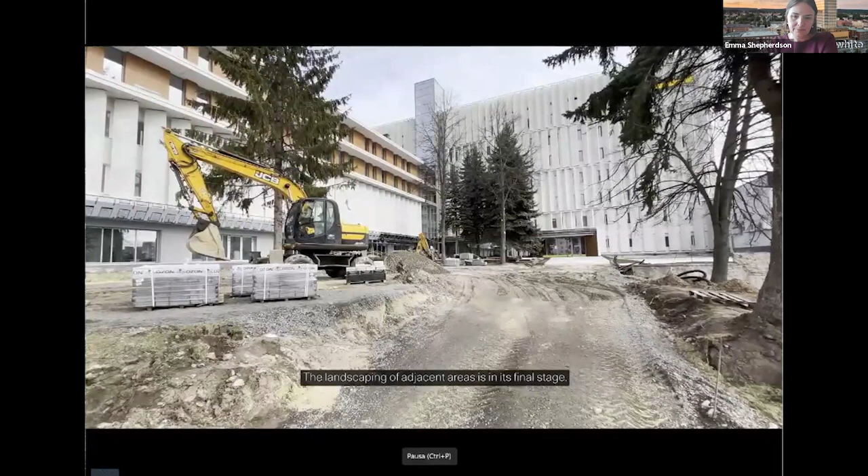Construction site, 12th of March 2025. The first stage involved the reconstruction of the 7-story building, with no significant changes to the overall volume. An accessible terrace was installed, and an external elevator was added, allowing transportation of patients on medical beds. Regarding the lower 3-story building, its reconstruction involved demolition of the upper, 4th technical floor. Two new floors made of CLT structures were then added. The landscaping of adjacent areas is in its final stage, with a large amount of earthwork being carried out to eliminate previous barriers.

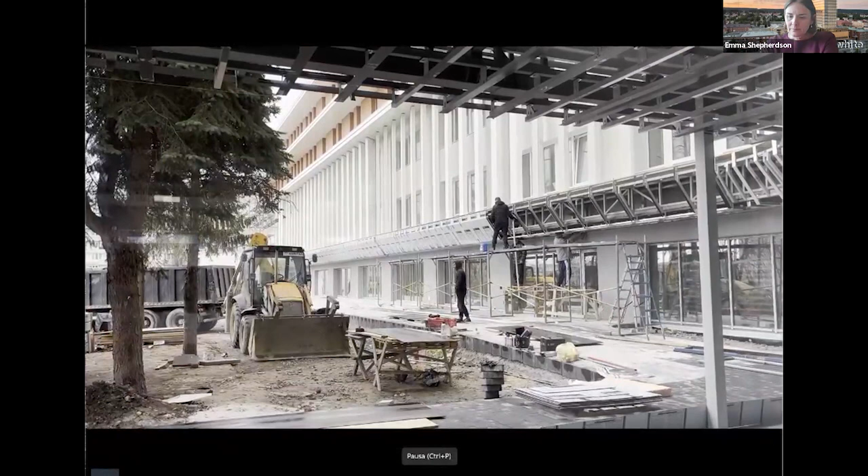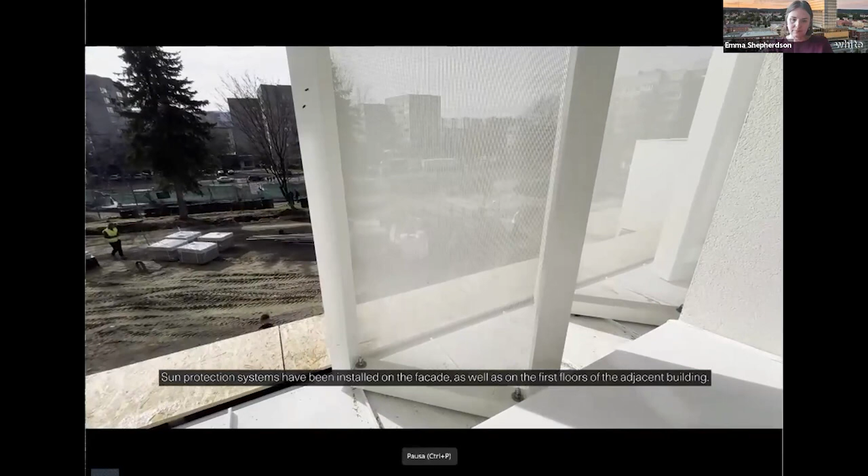The 7-story building has been reconstructed for rehabilitation purposes with patient rooms. Sun protection systems have been installed on the facade, as well as on the first floors of the adjacent building. A transparent tunnel connects the old hospital buildings.

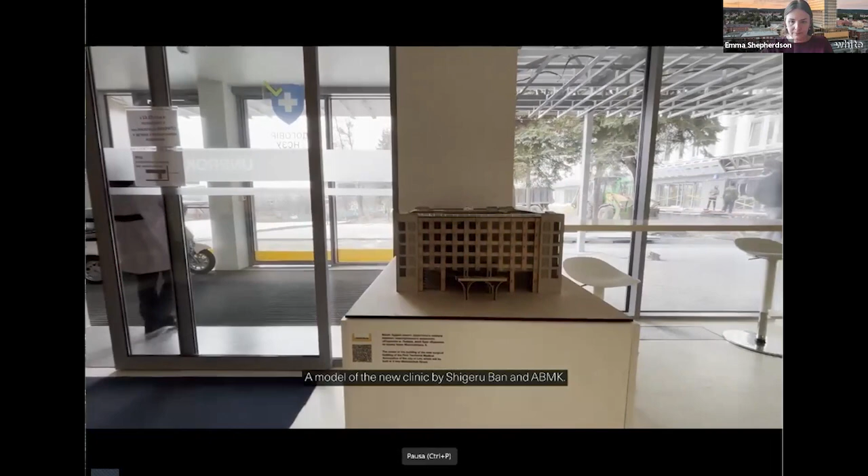All interiors have been fundamentally updated. A model of the new clinic by Shigeru Ban and ABMK. The reception area and entrance group have been updated, with ramps replacing the former stairs. A previously filled-in pool on the first floor has also been restored.

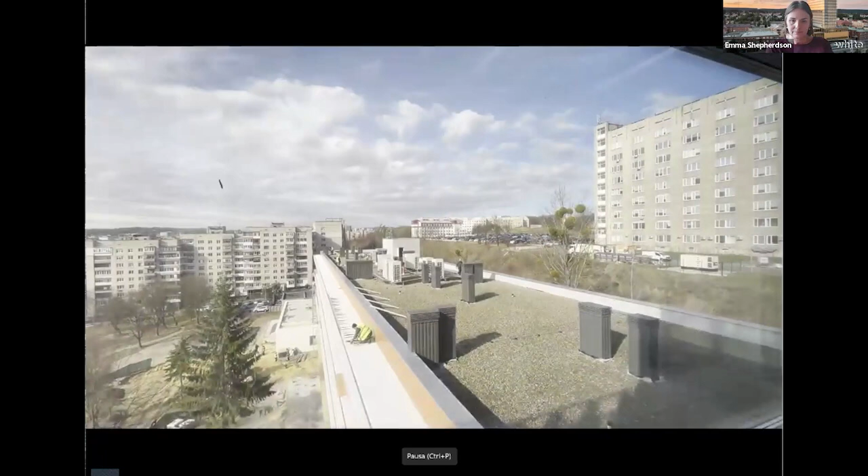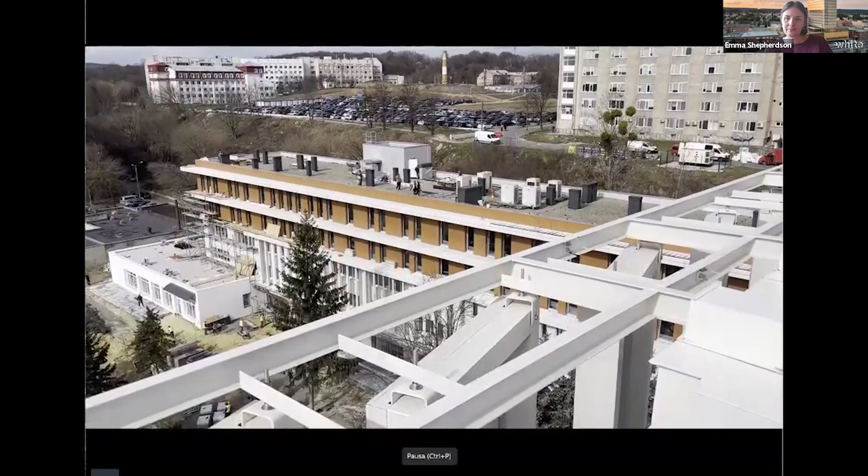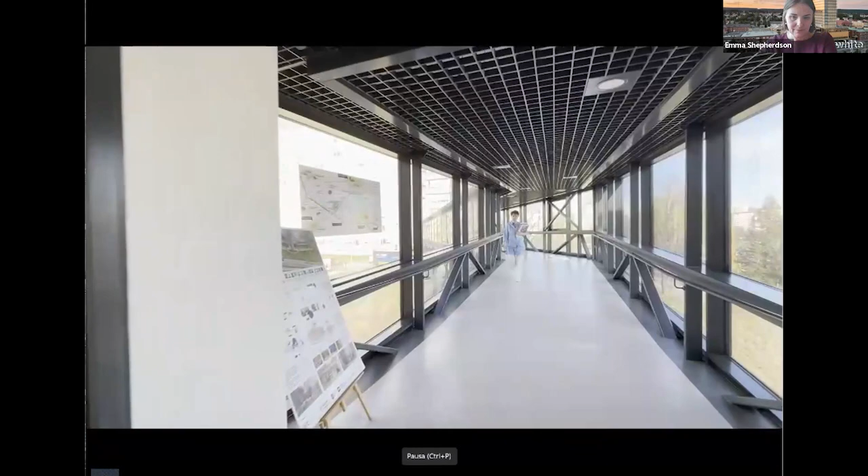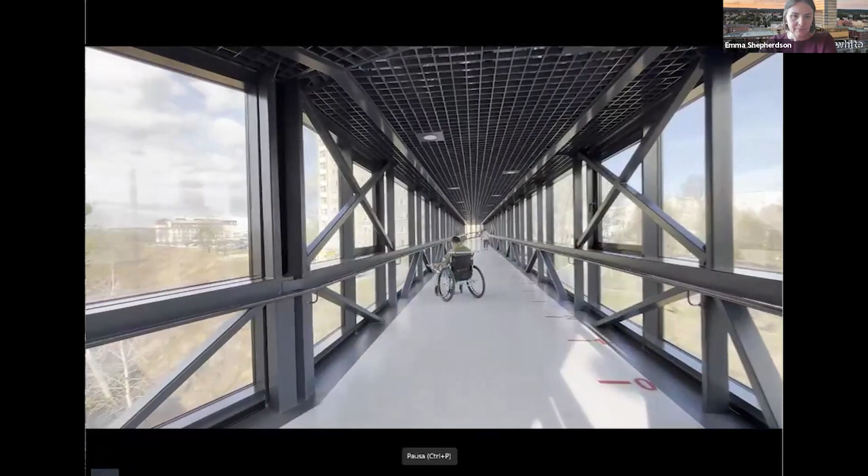An observation and recreational terrace has been created on the roof for clinic patients, combining physical and mental rehabilitation functions. The terrace also serves as an open-air event space for patients and visitors. On the 7th floor, in addition to rehabilitation rooms, there is an occupational therapy kitchen in the common area, and a meeting room.

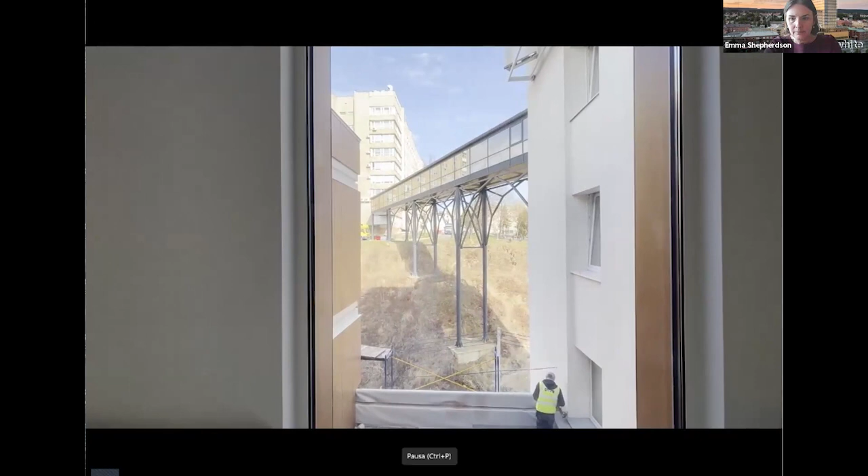View from a patient room window onto the renovated building facade. Corner Rehabilitation Ward.

In each room and restroom, a patient monitoring and staff alert system has been implemented, ensuring a quick response from medical personnel.

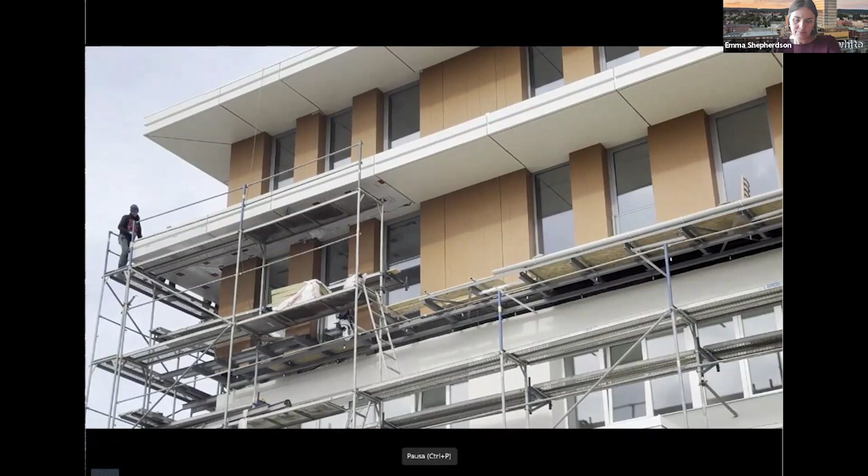The newly added upper volumes differ in material and color from the main structure.

Two crucial features of this technology, particularly important for our project, are weight and speed. The main volume of the extension was assembled on site within 2 weeks. The decision to add 2 lightweight construction floors made of CLT panels is innovative for Ukraine.

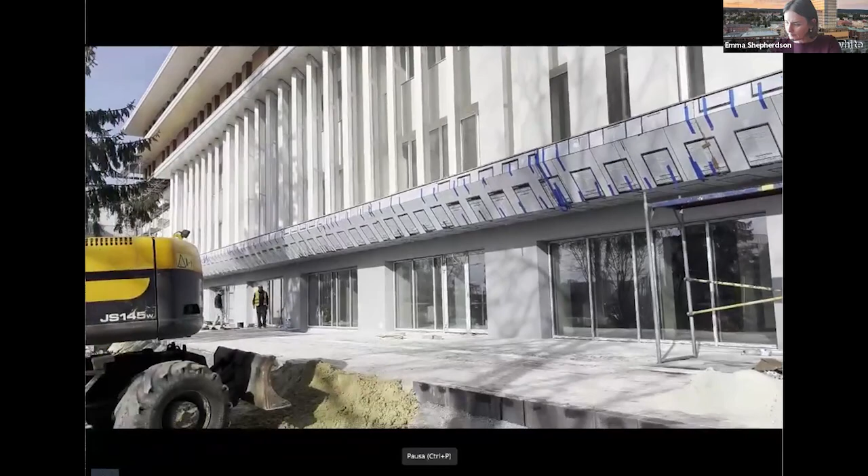Overall, despite initial skepticism, the city and the client are satisfied with the result. This gives us credit for further developing this technology in Ukraine. The ABMK team handled the architectural design, engineering, and technical support.

Rooftop of the timber addition with engineering equipment.

So that's it. Thank you, colleagues, for sharing.

I was not correct when I told about 2 months. The correct time was 2 weeks. So it's really incredible that it was possible in Ukraine.

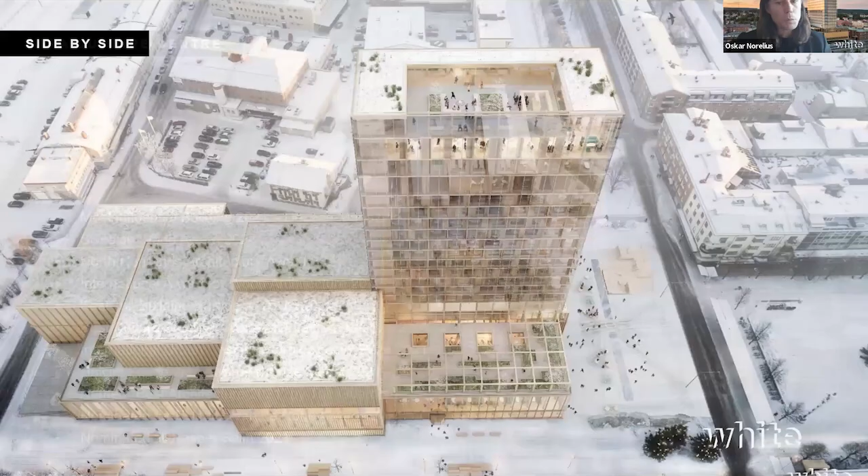Going back to the competition and our first approach, the building was to house approximately 30,000 square meters: a hotel with 200 rooms, restaurants, spa and gym, but also, and maybe first and foremost, a culture center with 6 theater stages of different sizes, the public library, and 2 exhibition halls for art. All of this was already existing in Skellefteå as activities of very high quality on a national level, to be co-located in this building right at the center of the city.

So this was our vision image, and the motto was side by side: we would create this series of volumes in a composition that made up the culture center, where each part was readable in the design of the building, and where every function had a purpose, a space built for its purpose.

This was also a big part of the puzzle: working with the intrinsic characteristics of timber, making sure we were not stacking programs over each other in a way that would make this impossible to build in timber. Instead we really sectioned everything up, making sure we had the flows internally, but also making sure that structurally we could realize this building in wood.

I mentioned the contents, and one key decision was that yes, we need to separate everything so we can work with the structure, the acoustics, and make the logistics work. But we also want people to come together, and these activities to function as a whole.

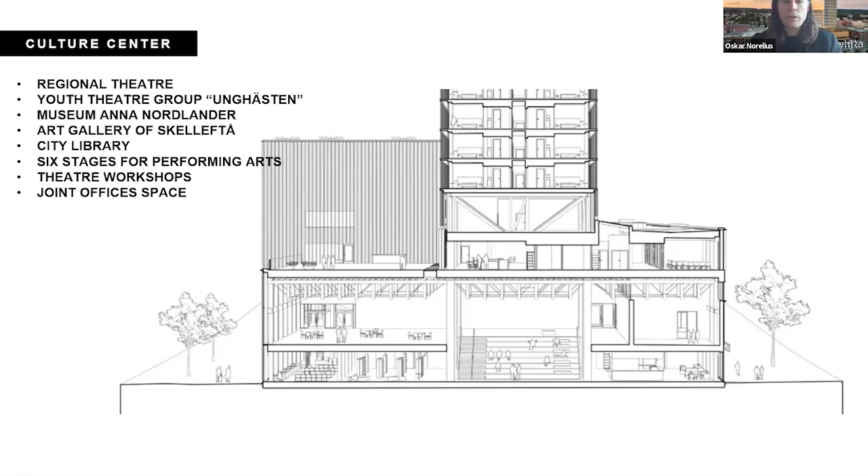This, of course, drives complexity. So we needed to work very closely with a structural engineer to make sure that this was feasible and could become a space where people would feel at home.

The same view in plan: you can see the main entrance on the right-hand side of the image, where you step into this culture staircase. You can see the massive columns supporting the hotel above, then the hotel lobby, the library that runs along the pedestrianized street on the west side, and then, sunken underground, the services and the trap rooms for the stages.

The site is sloping, so we have a one-story height difference from the main entrance to the south to the north. We get two public floors, but this one is public on the south and then becomes underground to the north. We'll come back to the upper level in a while.

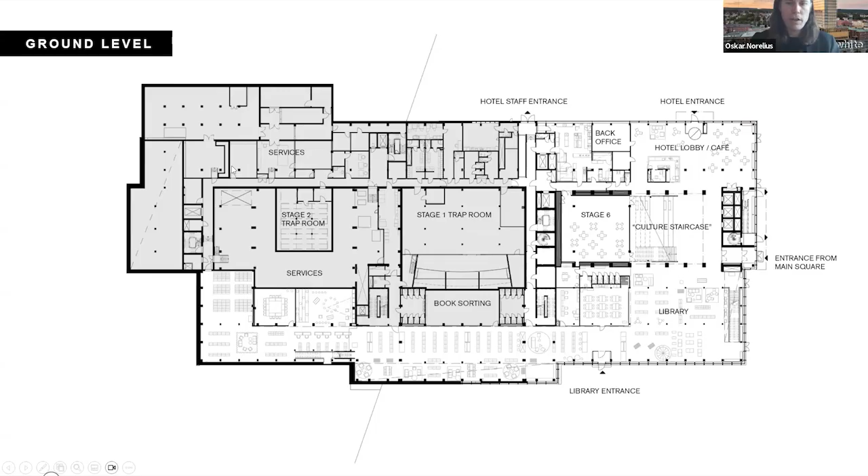This is the culture staircase, the central space you enter into, where we really worked to keep things as clean as possible, to make sure it was a space of high quality with symmetry, a space that people could really appreciate, even with all the challenges of the 20-story hotel above and all these different functions around this space.

You can see here that the timber is largely exposed: the floor slab above in CLT, the glulam columns, everything is visible. You can touch it, and it's really the structure of the building that shapes this space.

While we managed to get this very nice photo before the inauguration, this is what this space looks like most days, with spontaneous lectures or discussions, concerts, book readings. It's really a space being used by all of these actors in the building, bringing life to the Culture Center and to Skellefteå as a whole. You can see the importance of this kind of gathering in a large space like this, made in such a warm atmosphere thanks to the exposed timber.

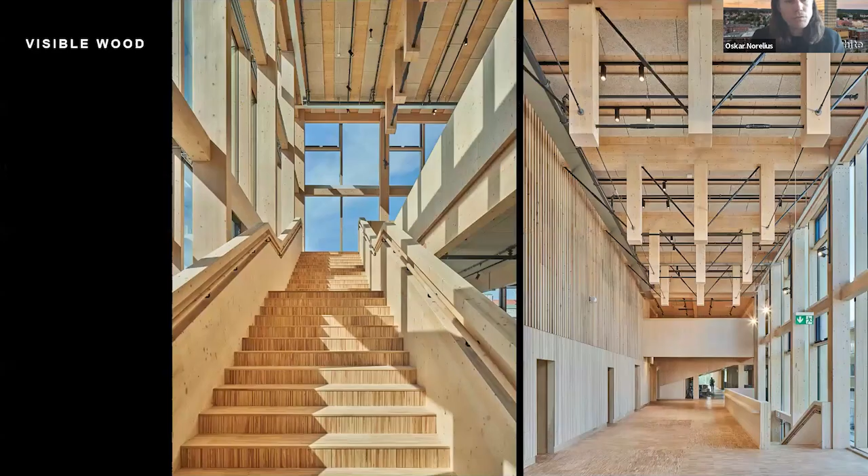Speaking of exposed timber, this was one of the big challenges, of course. We are realizing this building in mass timber to a very large extent. We knew it would be a challenge, so we really wanted to use all of this timber to shape the interior spaces, work with indoor climate, and make sure that the users could actually touch and feel the structure.

And not just something being told that there is timber behind a gypsum wall, for example. This is feasible in Sweden thanks to our regulation that is performance-based. It still required a lot of work to work out the fire protection strategy, but thanks to our regulation, it was possible through hard work with the fire engineers, the structural engineers, and us, the architects, to realize the building in this way. And then you can unlock the materiality of timber and these large-scale industrialized panels that do have this very human-scaled texture and the warmth to the touch that gives a completely new interface to a building of this scale to the users.

Stepping up one level, you can see the culture staircase going down to the main entrance to the south. We're now at level with the north entrance, which is the entrance from the travel center. And this is the level of all of the theater stages and the exhibition spaces. This was key in the design, to gather all of these functions on one level, where loading and switching between different activities and performances in these stages is very efficient.

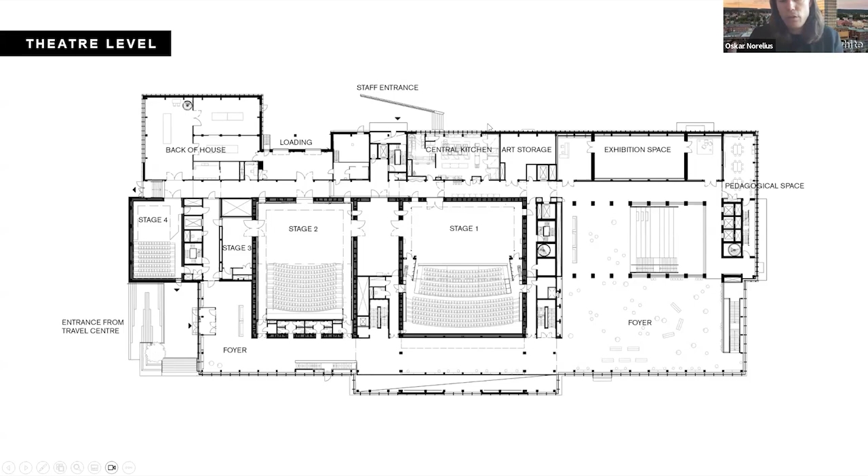And these spaces wrapping around need to be flexible. They need to be used for different purposes today, but they also need to ensure a long lifespan for this building, that it can be used in 50, 60, 80 years' time as a culture center. We have no idea today how that will be running, but we do know that with large spans, big open spaces, you can use it for dance rehearsals, exhibitions, book readings, gala dinners, and conferences already today. So this will be possible in the future.

This is what drove the design of these special trusses in the ceiling that you can see here. These are carrying the levels above—in this case, the terrace and the restaurant of the hotel. By working with a combination of timber and steel, we could express the different characteristics of these materials. Timber is very performant in compression, so all of the timber elements in these trusses are put under compression, whereas the elements in tension are made from steel, where steel is very efficient, so we could use very little material.

This way, you get the feeling that the space is as high as the slab and not as the bottom of the truss. So this allowed us to work with a more compact building while retaining the sense of space internally. And these trusses, you saw them above the culture stair—they guide visitors throughout all of the public spaces of this level. So you can get a progression through the building and always know that you're in a public space wherever you have these trusses in the ceiling.

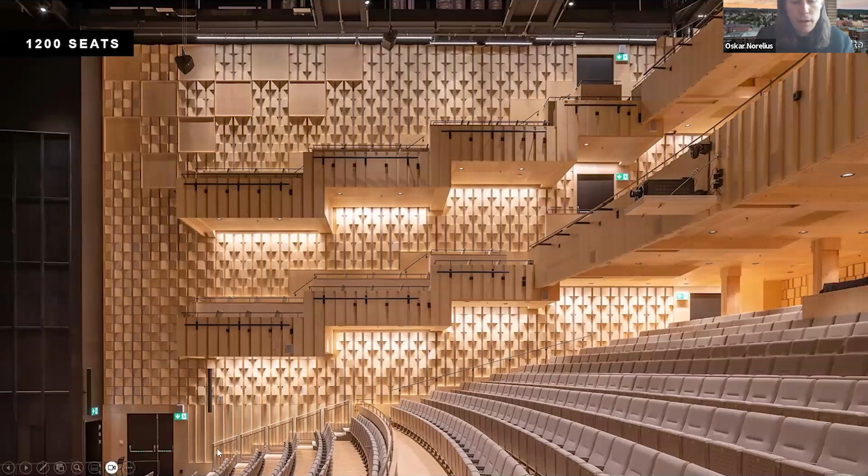So this is the largest stage, 1,200 seats. It's also a multifunctional space where the lower section of the parquet can be stored, so you can create a big flat floor and get 1,500 visitors for a concert with standing people. It can also be segmented into 2 different rooms, so you can have a conference in one and music in the other. It's very flexible to make sure it's used as much as possible and not an empty shrine most days of the year.

I hope that my voice will go well with the music if you hear it.

We've really designed the culture center here as a platform for creation. It was important for us to use timber in this project to create a very sustainable building, connected to the city of Skellefteå and its identity. But it's not a technical project that's all about construction material—it's actually a culture center that needs to work as a platform for creation for the citizens of Skellefteå.

This is a film from the 1-year anniversary of the building, where the local dance company set up a choreography in the double-skin facade of the hotel, where spectators could stand on the main square and see this performance that used the 20-story high-rise as its stage. This was nothing we had intended or planned for, but we're very happy it took place, and I think it shows how the users of this building have really appropriated it and found new ways of using it.

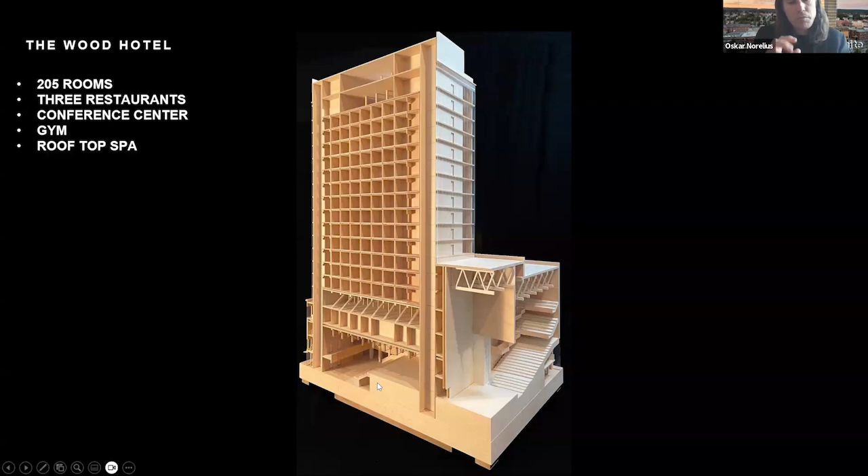You can see here how it's connected to the main stage that we cut in this timber model that we have in our London office. Here you can see the repetition of all the small room modules, how they hover above the culture staircase—so there's very firm integration, structurally, between the hotel and the culture center.

This floor plan was actually something we drew up in the very first sketching with the structural engineer in the competition phase, where we decided to propose a modular hotel room system with standardized, quite compact hotel rooms, so that people could be in their rooms but also come down to the culture center if they wanted more space or wanted to interact.

These modules are positioned between 2 cores, which if we'd done a traditional project based on concrete and steel construction, we would probably have had a central core and 2 escape staircases. Here we decided to put the cores at either end of the building to make it structurally stronger, giving us the opportunity to push timber construction and use as much timber as possible in stabilizing the hotel.

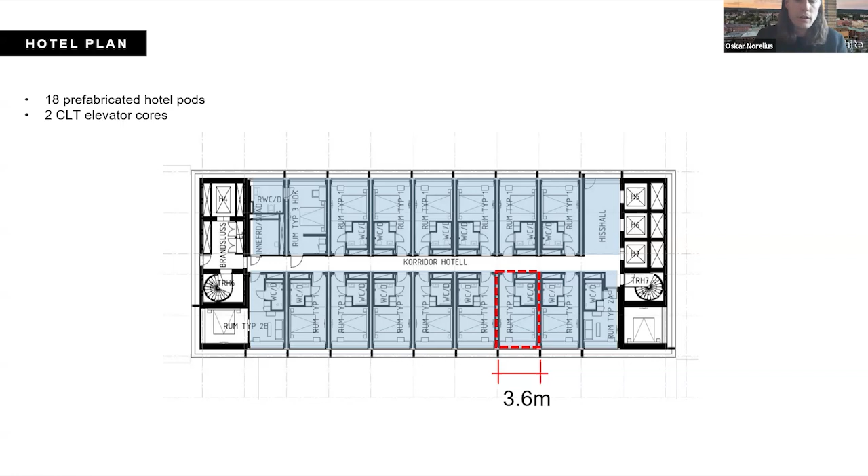The rooms also have exposed structural timber within them. The walls are CLT panels that are structural for the room but also for stabilizing the entire tower. The ceilings are made from CLT, and the floor slab is CLT, but covered with carpet.

These compact rooms with timber all around feature a fully glazed facade, so you can really get the maximum view over the landscape and the city—a vantage point that was not available before a building of this height was built here.

While planning this, bringing public functions and gathering a lot of people at the top of a high-rise brings even more complexity for evacuation strategies and technical issues with water pumping up to the spa, but also all the media and air needed for the restaurants. But it was important for us to plan this as a state-of-the-art high-rise building where you can actually come up to the top as a visitor and look out onto the city.

This building is visible from afar, so it's really a big part of the skyline. It's important for us that anyone visiting or living in Skellefteå could have access to go up here without staying at the hotel.

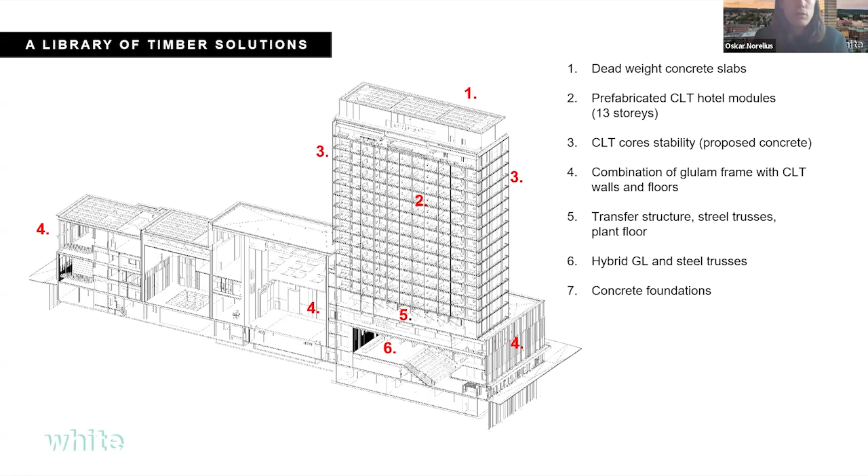And to add weight to the tower, the top 3 levels, so the ceiling and the 2 top slabs, are made from prefabricated concrete to add weight, but they are carried by timber elements and stabilized by timber elements. So they're just there to add weight to the tower top to reduce the accelerations in case of wind.

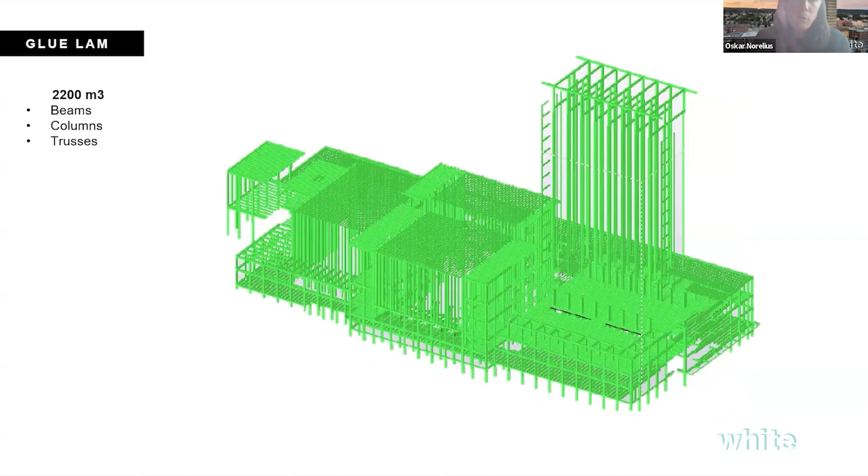This is from the Revit model, taking out all of the CLT elements. It's 9,500 cubic meters all in all, so you can see it's a very large part of the construction is made from CLT. This is combined with glue lam, which, even if it's all over the building as well, is more efficient in material use - 2,200 cubic meters for the beams and columns.

And of course, these elements are connected by steel connections, basically. But the fact that we have these models is also thanks to our quite advanced digital design process for this project. This was key to allow us to innovate and work together with the structural engineers, the contractor, the client, which I didn't mention is the municipality of Skellefteå.

So we used this common model for sustainability simulations for daylight and wind, for communication with the politicians and the inhabitants of Skellefteå during consultations through AR and VR visits, visualization for communication, of course, review collisions, coordination with the design team, and then finally quantity takeoffs through databases for doors and quantities, and then on-site surveillance in BIM kiosks.

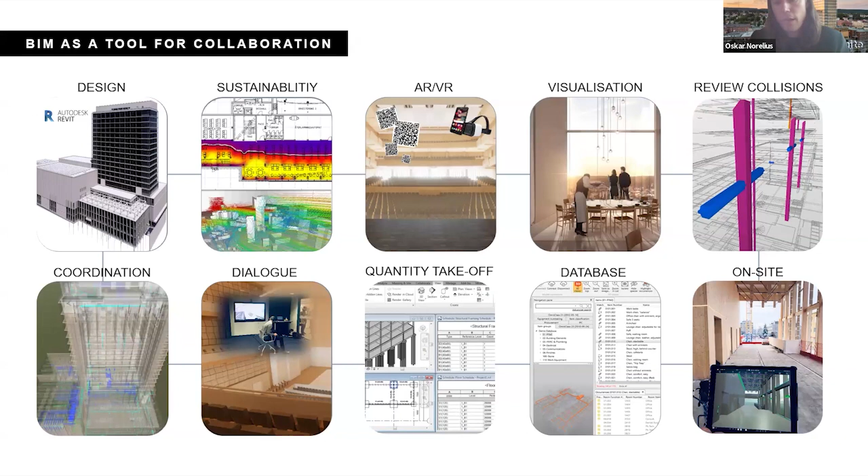Where the construction workers every morning could look through on an iPad what the work of the day was, the purpose of the work of the day, and how things were to be organized.

Being the general consultant for the project until the construction design, when the contractor took over, we made sure that all of our co-consultants were working in the same Revit model as us. This allowed for very tight integration and a very good dialogue within the team.

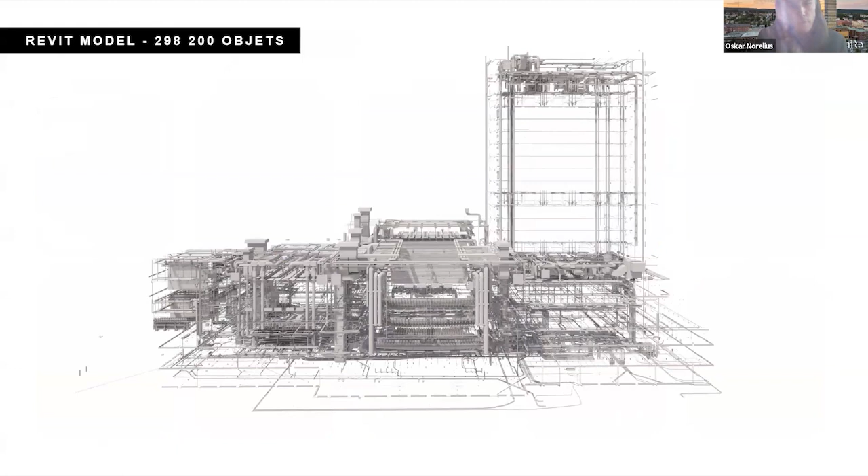You can see here, as we add the different disciplines to this Revit model, that it becomes very complex. We had almost 300,000 objects in this common model, so it needs a lot of rigor to make sure that this works well. But when you have that in place, of course, the project is very smooth and any mistakes or issues are found in the model rather than on site.

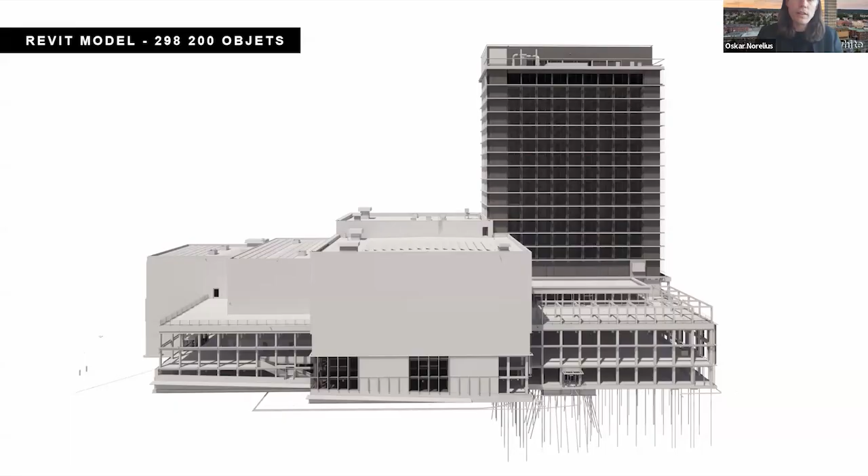Moving on to the construction site, we really pushed prefabrication and local prefabrication. The CLT factory is based 50 kilometers from Skellefteå. The timber is locally sourced, and we really strived to make as large elements as possible in the factory so that assembly on site was quick and efficient.

The contractor, Norwegian Hent, estimates that we've saved 1 year in construction time. It's not a 2-week montage, unfortunately, of the structure, but a 73-week montage - but it's a very large building. And even though it was almost 2 years of building on the site, we had 0 complaints on the site works because it's so silent working with timber.

This is a very important issue for a project like this, located at the very center of a city: the construction cannot have, it's important that construction has as little impact as possible on city life. Potentially, this could have ruined restaurants or shops in the vicinity, which would have had a lot of issues to come back from.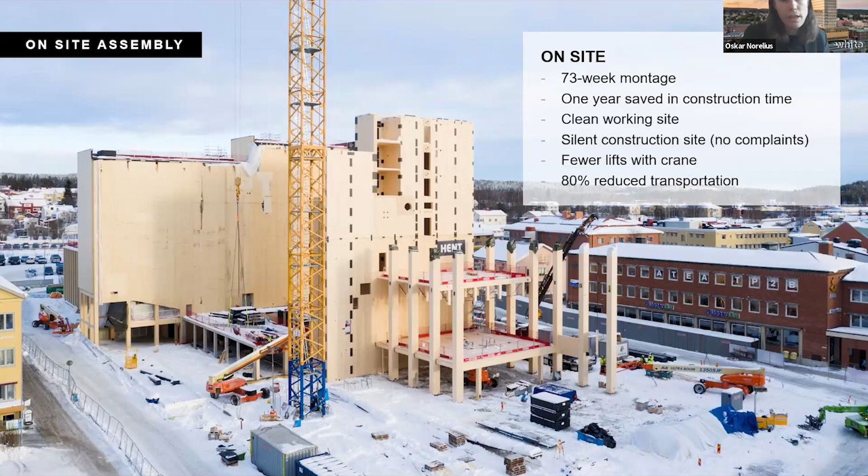It's both the silence on site, but also the reduction of transportation - 80% fewer trucks, because they can be loaded so efficiently with the lightweight timber.

The phasing of construction was also made quite differently. This construction was made without weatherproofing, so construction started to the north from the ground up to a finished roof, where the facades could be mounted, protecting the timber and avoiding it being exposed for a very long time to the weather.

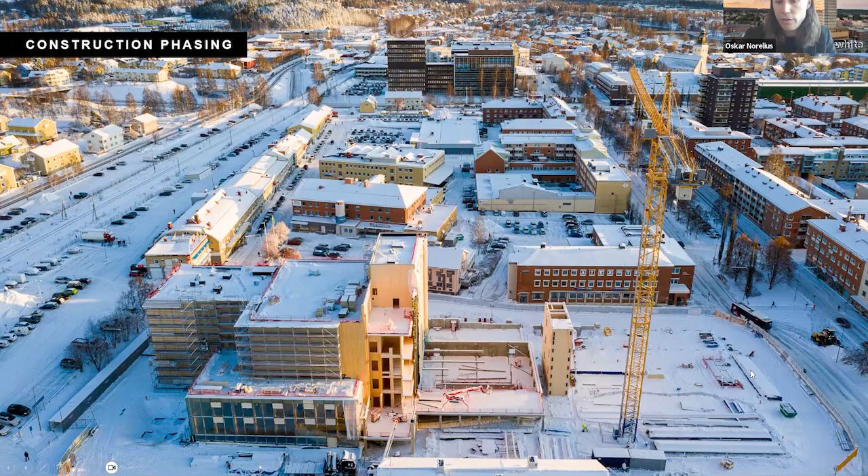This was done in winter time, which is good because any downfall comes as snow instead of rain. But this was also done during summer, where the timber was subjected to rain whenever exposed. You can see the facades and roof are already done on the northern parts, while foundations are being laid for the hotel to the south - a very different construction phasing and design planning.

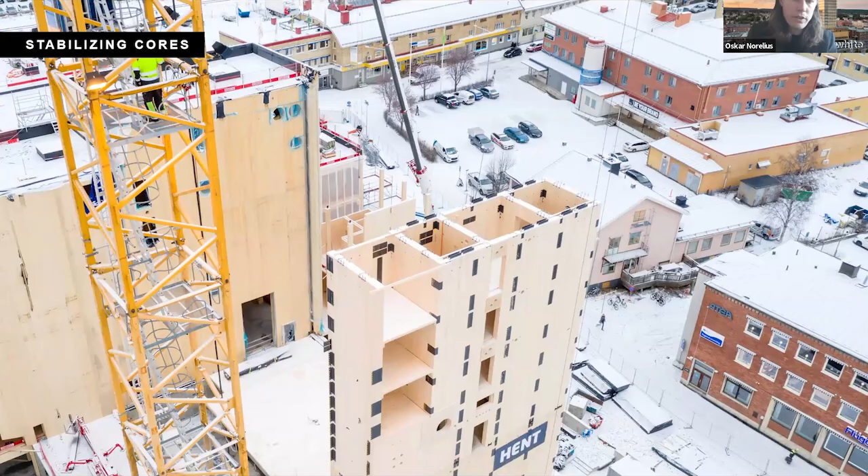You can also see the stabilizing cores that we managed to realize in CLT. There's no concrete stabilizing this building - it's all made from CLT and glulam.

The hotel rooms, as we said, were prefabricated modules - we managed to carry this all the way through. This is the first prototype in the factory, and this is another factory, also 50 kilometers from the site. You can see how these modules are built up with CLT walls, ceilings and slabs, and glulam columns at either end.

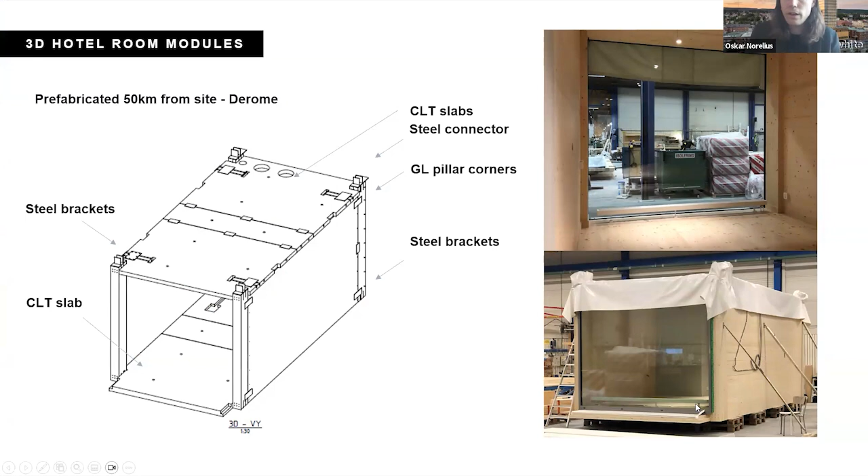They were fitted with the interior part of the facade, so triple glazing, the climate shield, with radiators and plumbing. The bathroom is already done, and the carpet is laid inside as well. So these modules are essentially plug and play as they arrived 2 by 2 on lorries to the construction site.

Here we were also very fast - I think the peak speed was 2 floors, or 1 floor per week, in case there wasn't too much wind. You can also see, apart from the modules, the cores here that are 4-story high elements to make their assembly quick on site as well.

The outer skin of the hotel protects the exposed cores, but also the solar shading of the rooms is mounted on site. You can see the timber facades of the culture center that were mounted on site in the foreground of this image.

Fire safety has been mentioned a few times - I'll speed up so we have time for questions. The building is rated BR0 according to Swedish certification, which means it needs analytical dimensioning. This means the fire engineer needs to do a holistic strategy of evacuation and fire protection.

We've worked quite intensely throughout the whole project with this, and it ended up having the hotel tower fire rated to 90 minutes, meaning it should withstand an hour and a half of fully developed fire before potentially collapsing. The culture center has a lower rating of R60, 60 minutes, because it's much easier to evacuate. This certification is achieved through over-dimensioning of all the structural timber elements.

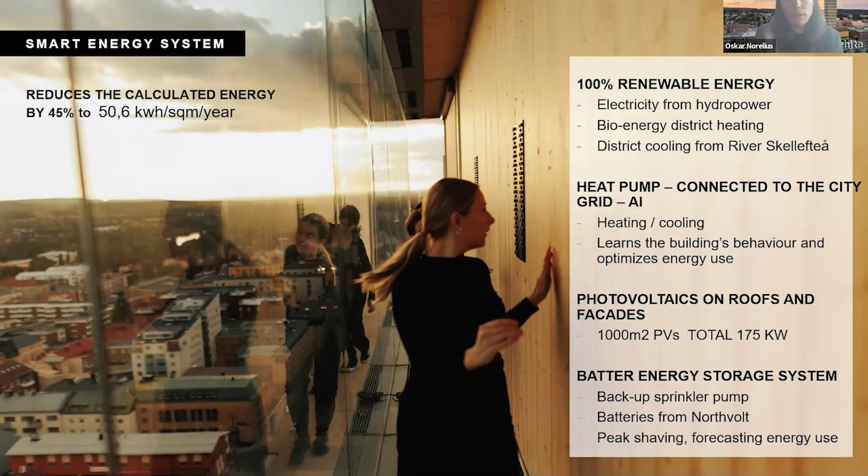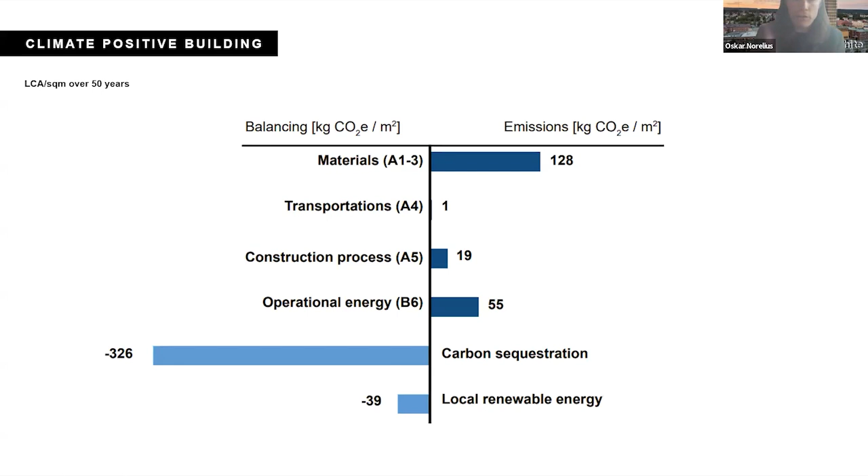This is compensated by local renewable energy and the sequestration of carbon in the structure, which is why we claim this is a climate positive building over its lifespan, meaning it's part of a circular construction industry. Over 50 years, the emissions related to this building are almost half the balancing measures of the stored carbon and the produced energy.

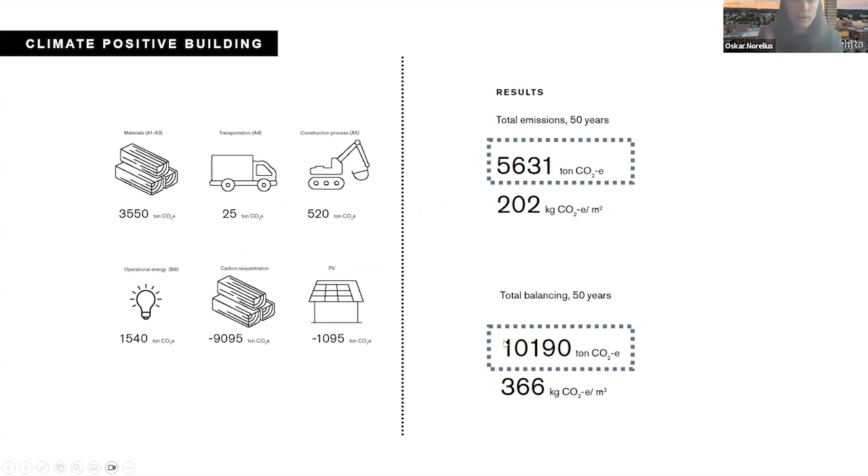We did another research lab project to round this off, because we've talked about this project outside of Sweden quite a lot, in the Middle East, the US, other parts of Europe and Africa. Sometimes people say, we don't have a forest like you, so it doesn't make sense to build in timber. We wanted to investigate that idea: if you have to transport timber, what impact does it really have? Our finding is that, yes, we should absolutely push for local sourcing to reduce transportation emissions and cost, but if you do need to transport timber, it's still fine and a lot better than conventional solutions.

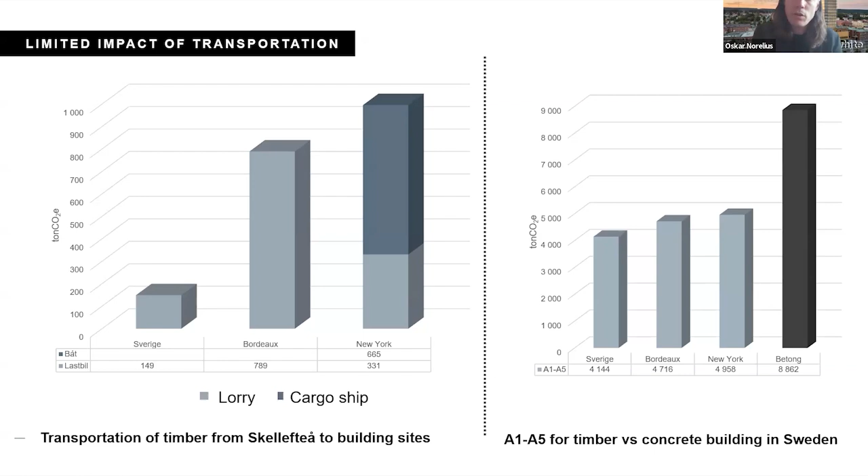So this is really something we're pushing today: use local as much as possible, but if you can't, it's still more interesting to work with bio-based solutions, even if they have to be transported.

I think this is my last slide. I'm sorry if I ran over, but I'm happy to keep discussing the challenges, technical issues, and solutions we found in this project. But it always comes back to architecture and public and urban design - these buildings we're realizing with new materials should not just be technical showcases. They really need to be buildings that have a function in their city and add to its attractivity. I think this is why the Sara Cultural Center has become such a beacon, even being selected as one of the world's greatest places in 2022 - something no one would have thought possible only 5 or 6 years earlier in a city in this location.